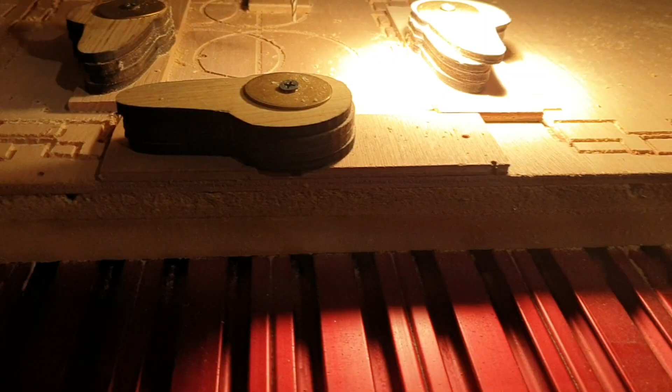And this is the setup that I put in here. Basically, I just have a bunch of cams. They're cut with a laser, and so they're all the same size. And of course, you can cut them with the CNC as well. But actually, it's a little faster if you cut them with the laser. Anyway, let me go ahead and raise this up.

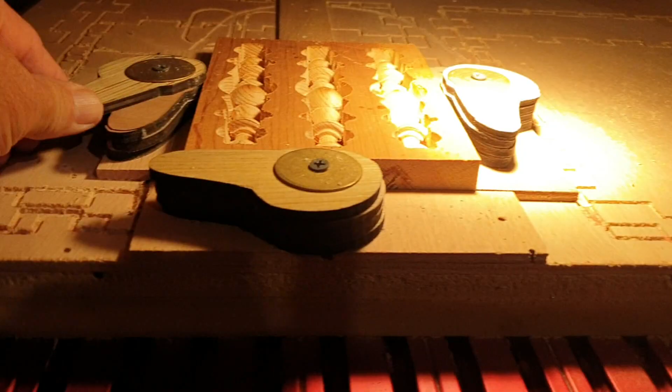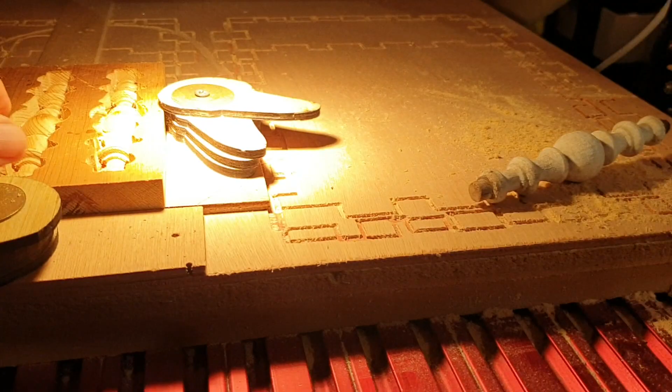And basically, all I need to do is take this block and put it in there, and then all the lower cams come up against the sides, and then the top cams go over the top. So that locks it all in good and tight, and all these other cams come in there, and so they hold it really well. And of course, this keeps it from coming up. So this is a great way. And of course, there's a 1/4 inch plywood that I've nailed down with 23 gauge pin nails, and then they have the screw that goes down and holds it all down. So those kind of things.

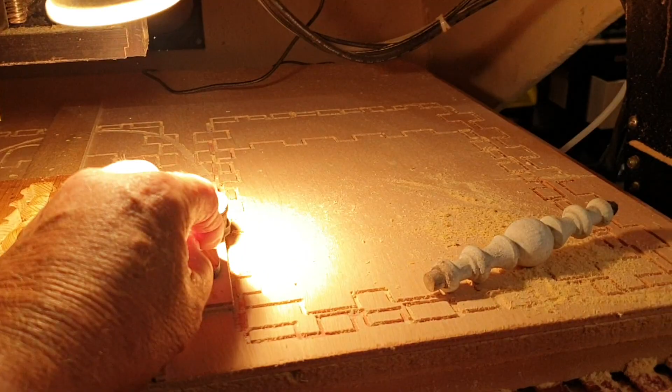So these are my scraps that were basically for the trash, and I just cut them all the same size so they fit inside the little square fence over there. So whenever I'm ready to mill this, I just run the 2 tool paths, which is a 1/4 inch ball nose and then an 1/8 inch ball nose, and these have a flat spot on them so that all the sides line up, and then I just rotate the thing over and put it back in there.

And what's nice about this setup is that all these other little toggles tighten up against the sides, and then this one holds it there, so it makes it easy to change your workpiece, and those screws hold it down. And so I could do a bunch. I need to make 8 of these, so when I get the pattern laid out, then I'll do that. So that's all coming together pretty good.

And let me go over here to what I'm kind of doing. And this is, of course, modeling on cheapo scrappo stuff. And then probably I will use a piece of cedar just for the rot resistance of it. Some white oak would be good as well. But anyway, let me go over here. All right, I just had 3 more of those blocks.

So they need to be 1 inch thick. So I glued 3 3/4 inch pieces, which gives me 2 1/4 inches. So I figured I'd be able to cut it down the center and have a 1 inch block left over when I'm done with it. And so I just put that on and used some Titebond glue to glue it together. So that'll be glued up in the morning. So that'll give me 2 pieces of that.

So I mean, that's still not quite enough, but that'll give me 2 blanks to experiment on. So there I go there. One thing I like about the Shark is it doesn't do any homing. Homing's where you start at when you turn on your machine and you home it, and then you set your home. That's where home is.

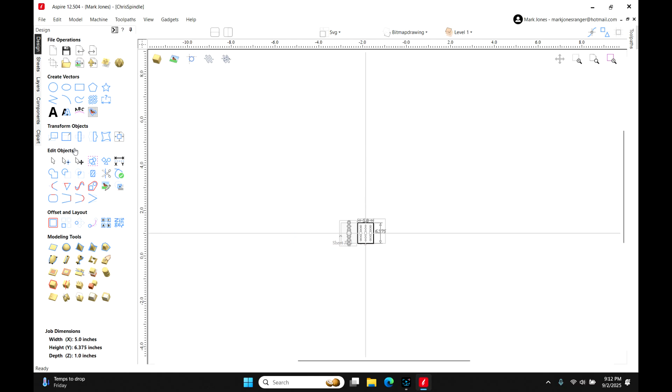All right, I'm working on a spindle detail. I kind of outlined a little bit out in the shop, but basically what I ended up doing was taking one of these spindles, and I started off with creating a scan on my flatbed scanner. I took this spindle and laid it on there and I scanned it. And that gave me basically all of the things that I wanted on there.

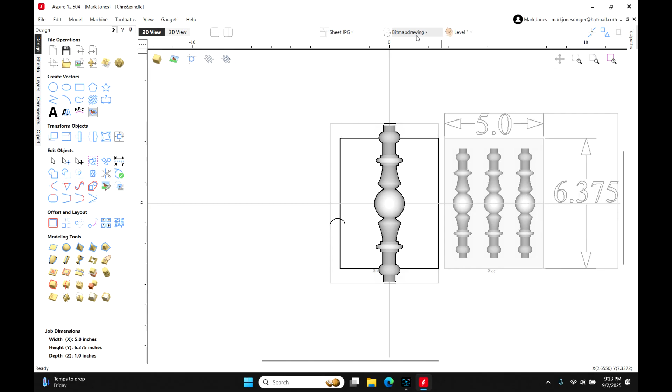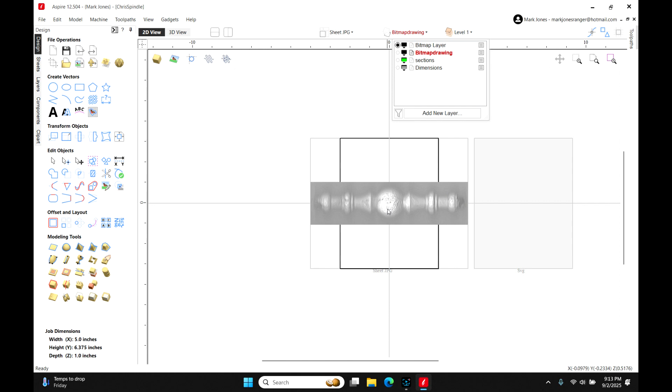And then what I did is I come over to this particular item. Let me go ahead and turn off the bitmaps and turn off the dimensions, turn on the bitmap layer. And I basically just brought that in off of a scan, which gave me all of my details. And then I basically drew a line. It's just a vector line that divided this in half. And then I did this and quartered it. So I put 2 lines in here, which basically quartered this.

And then I zoomed in, and I did the bitmap outlay where I had it scan the drawing, and it created the bitmap sections as far as drawing it. And I also drew rectangular boxes around the different sections and the height of where they fit on the ball from the center out. And then these are the other parts.

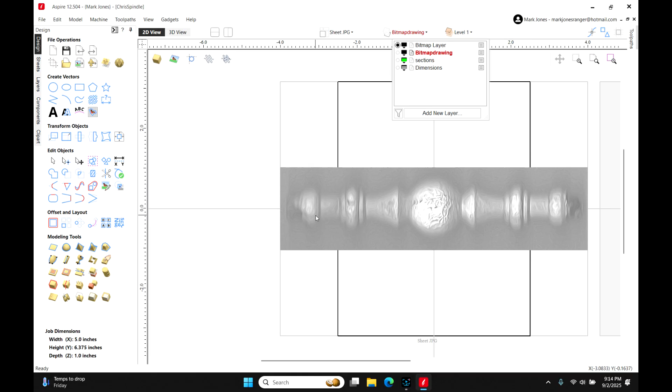And then with the drawing, let's see here, where are they at? Dimensions, sections, okay. Drawings, and this is the one that has the drawings that went around this, and of course I've rotated it. Let me go ahead and turn that off real quick. After I did that line that divided this down the center and this one down the center, then I took these boxes that were turned on with the sections, and I compiled that to where it fit into that.

I did some node editing, so I cleaned it up and followed all the grooves and made these fit to the point where I have this one here. Let me turn off the rest of them things there. And that gave me 2 rails, and I separated the 2 rails. I basically took that section, and then I mirrored it over to the right, and I bonded those 2, and I cleaned up my nodes and made everything nice and pretty. And then I mirrored that to this side so that I had one vector line that went all the way over here to this side here.

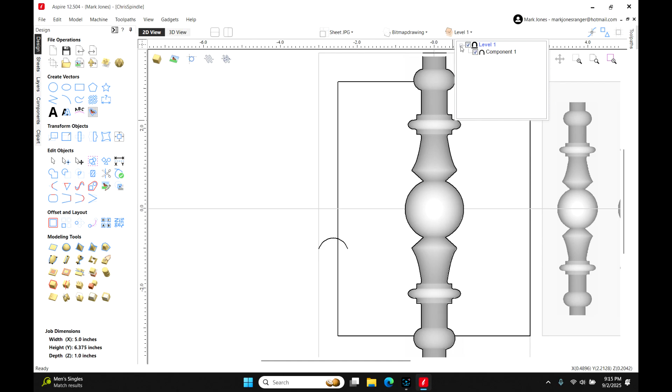And let me turn this level off here to see if I can get this to not show. Okay, there's your vector lines. And let me zoom out a little bit. And so I basically had this vector, which was one line, and then I mirrored it over to the other side, and then I did a 2 rail sweep on that, where I went over here and I went sweep between 2 rails, and I created this, which is like half of a detail.

I should have probably made this a little bit almost like a full circle in there, but anyway, the first one came out and it did real well. So then it went between these 2 with this shape, and it created this little guy right here. Let me go back and turn that thing back on.

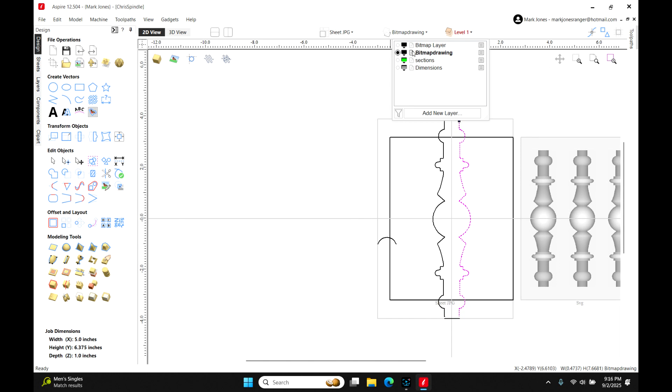And not quite that one. Let's turn this layer on here. And then I set my height, and I went in and I adjusted my height to the model. And at first I thought, well, I just want a 1/2 inch. And, of course, I'm just kind of playing around. I don't do a lot of 3D modeling. I made a little chess piece, but this was a little bit different.

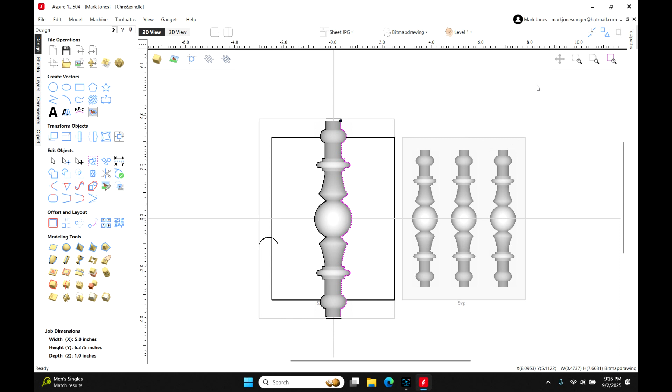So anyway, I got this, and then I resized it down to the size that fit. And then I put that in there, and I got it about to the right size. And I set my file dimensions to 1 inch, which is from this point to the other side. That's a 1 inch ball, so that pretty well determines it. And it's 1 inch. And then this is the block of wood that I'm milling this all in.

So after I resized all that and got that set up, then I came over here and I copied that over to this deal. Of course, I turned it. And this sheet right here now is set at the 1 inch, and all those settings are good. And then I set my tool paths. I've got a 1/8 inch ball nose, which is like the rough cut. And then I got the 16th inch ball nose that's doing the finish cut. And it's going through there and it's cleaning it up.

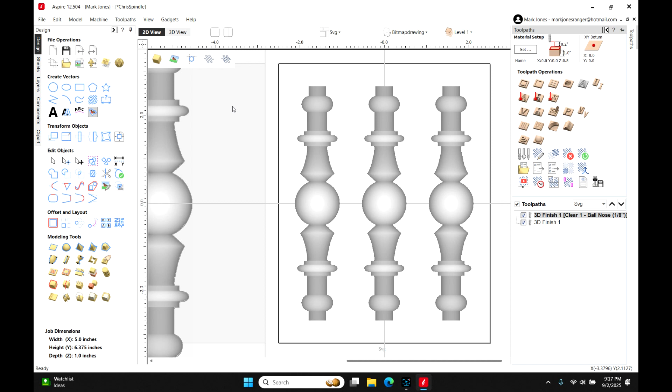Now, what I have done is set in my model thickness. I had this down in here on the first one. This wasn't all the way to the top, and so that's why it didn't carve down in there. And a quick way of doing that was just to turn my tool paths on. Go over here to 3D view and turn my tool paths up to look at where I'm at with that. And of course, let's go down here to preview. And so there we are here. I'm going to turn my tool paths back on. But anyway, that is where I was at there at that point.

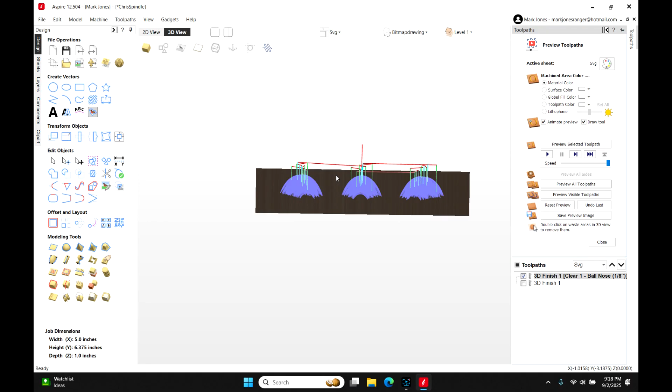So let's go right here. And I'm still not satisfied that I have this exactly right. This will be the third deal, and I'm kind of keeping it. What I did is I did increase my model height. I went up here to my level. I went down here to the first one, which I basically just copied these and then baked them again. But I went down to this component right here, and I set my size.

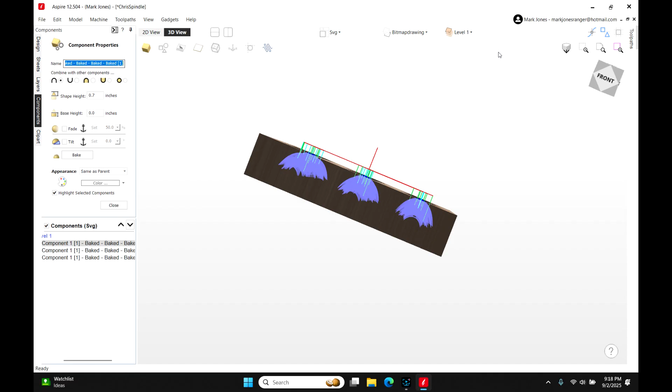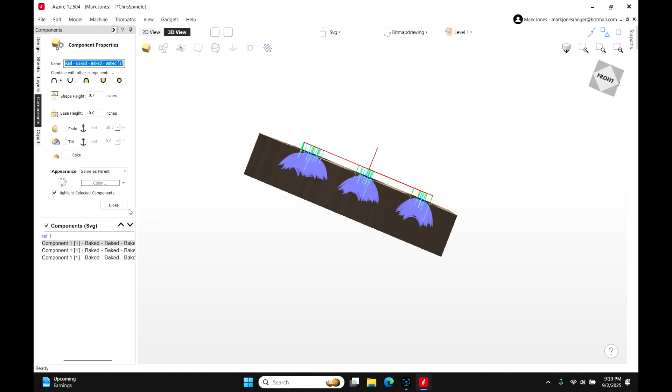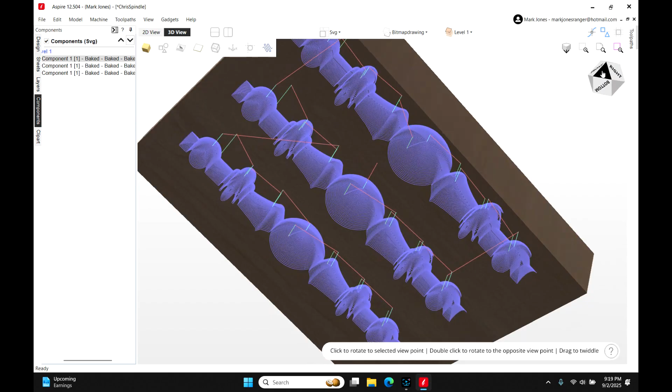Got my bitmap drawing, and turn this thing around a little bit. There's the front. And then we'll just look at it right here, but that's your 3 spindles in your sides. It's pretty cool looking. I've got my material black. It's just kind of that way. But anyway, I'm kind of anxious to model that 1 inch piece out there to see where this comes out, and pretty good looking. So far the project's coming to where it's looking pretty good.

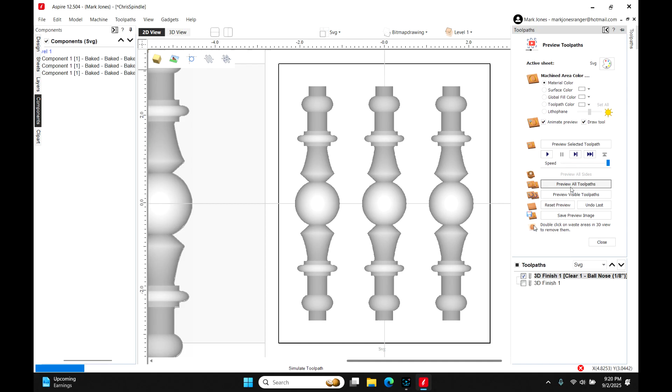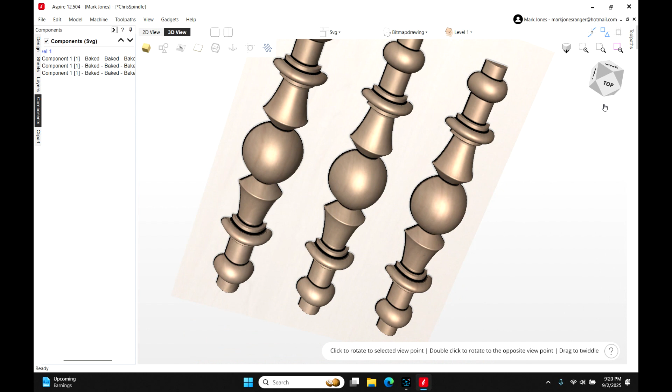So, of course, my tool paths on all 3 of them in my preview. So we'll preview all tool paths, and then we'll click close, go back over here to 3D view, and this is kind of what it should look like here. Yeah, so there we are there, and I'm hoping they will be wide enough so when they start carving from the other direction, then they'll probably be fairly round. So I did make these ends down here a little bit odd, but I'm doing a double dimension.

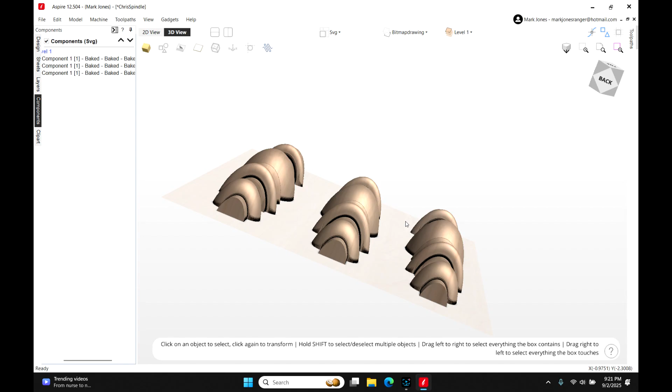I'd love to have a 4th axis to turn these on, but I don't, and I've got to make 8 of them. So they're a little oblong shape, but I'm going to be flipping them and turning them from the other side. So I'm thinking that this next mill will catch these about right in here. So where this black is, it'll catch them about right in here. So hopefully this will be in the right angle, but I'm not really sure. But anyway, they came out pretty cool looking with just a 2-rail sweep, and I'm anxious to get them carved up and check it out.

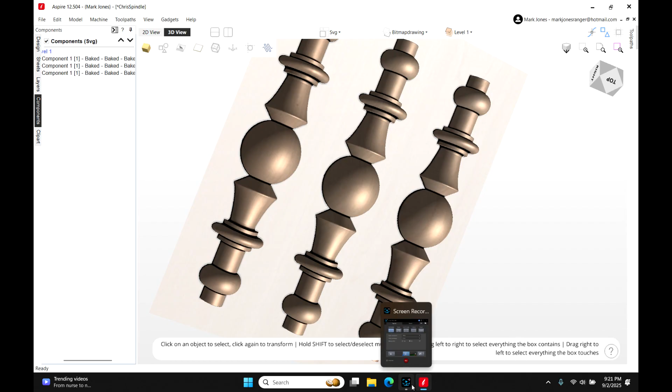And I love Aspire. I love the programming part. I love everything about it. It's just a joy to use, and that's kind of where we're at. So let's go ahead and turn this off right now.